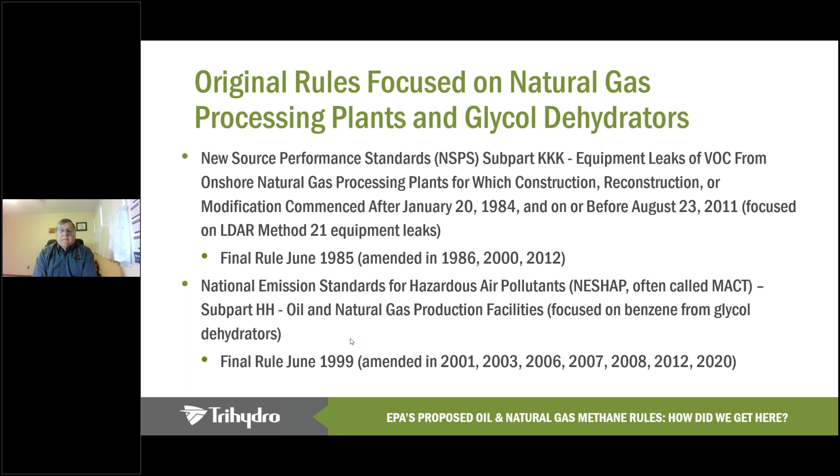Then came what I refer to as the production-oriented regulations. They're the ones that most people are thinking about, especially in the upstream oil and gas production sector. First, there was Quad O. That's a new source performance standard, and it applied to facilities that were modified, constructed, or reconstructed after August of 2011 and before September 18th, 2015. That rule first came out in August of 2012, and it was amended several times over the years, which makes it a little challenging to keep up with all those details.

Then came the infamous Quad OA. That's what most people are thinking about and dealing with right now on the upstream side of the world. Quad OA was finalized in June of 2016. It applies to facilities that were constructed, modified, or reconstructed after September 18th, 2015. And again, there have been several modifications since that period in time. Next slide.

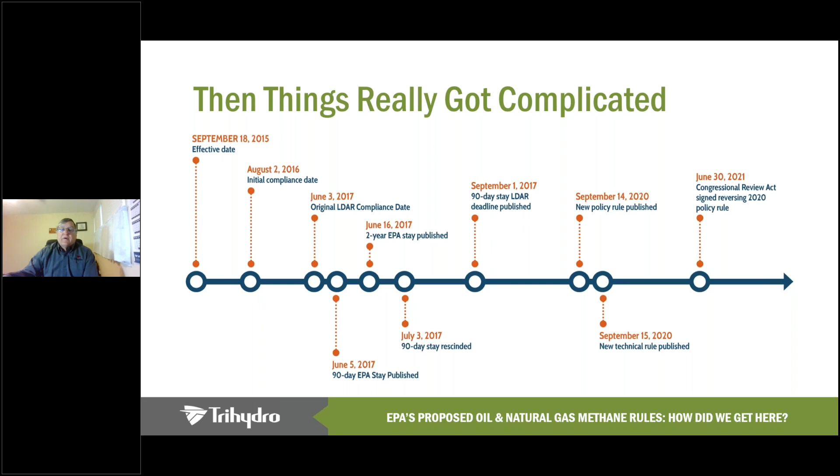So with this, I'm going to go ahead and transfer over after this slide to Jennifer Biever. But I thought I'd give a little background for Jennifer before she starts. Jennifer is a director at Williams, Weiss, Fowler, and Ferguson. She's a licensed attorney in Colorado, North Dakota, and New Mexico. She assists companies with respect to all aspects of state and federal air quality and climate change regulatory regimes, including rule and guidance development, permitting, implementation of guidance programs, self-evaluation of compliance, and enforcement.

Jennifer is one of the leading legal experts on methane emissions from the oil and gas sector, having led industry's efforts in Colorado's numerous methane rulemakings, and having represented several companies in enforcement at the state and federal agencies with respect to emissions from oil and gas storage tank facilities. Jennifer has represented a range of companies in the energy and natural resource space, from oil and gas operators, pipeline companies, ski areas, mining companies, and industry trade associations. Jennifer will be sharing EPA's proposed NSPS Quad OB and Quad OC proposals. And Jennifer, I'll turn the presentation over to you.

Thank you so much, Jay. I'm really happy to be here with all of you today. I think Jay did a great job of explaining the quagmire that is Quad O, as I like to say. One of the things that I thought about doing, but then I figured it would make you try and guess my age, was to do a poll on what Quad O letter they will be on when I decide to retire. That's kind of my internal ongoing bet that I keep placing with myself.

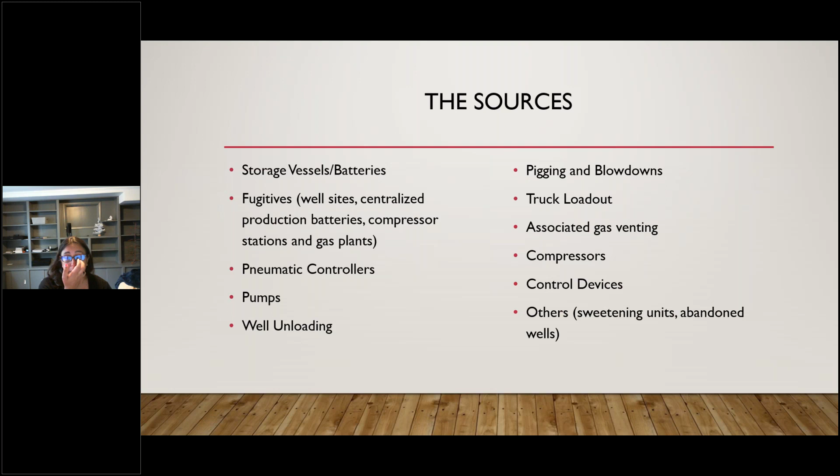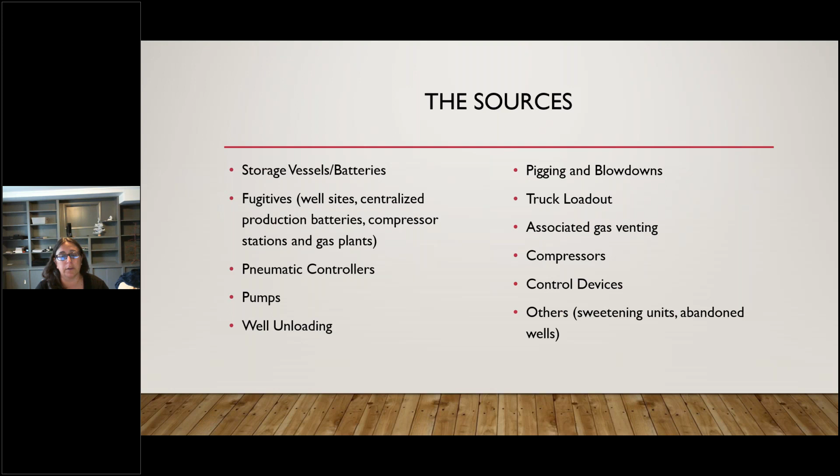Truck loadout, associated gas venting, essentially, either venting or potentially requiring flaring from separation equipment when you can't get into a gas sales line. Compressors, and control devices, the actual control devices that are used on the pumps, the storage tanks, the associated gas venting, and then a few other topics like sweetening units and abandoned wells. Next slide, please.

So let's talk about storage vessels. What they're doing with storage vessels is pretty significant. And as many of you probably know, there is a lot of history around storage vessels under Quad O, and generally with EPA. When EPA first did this, they did the Quad O and Quad OA on an individual storage vessel by storage vessel basis, as opposed to a battery. But the reality is that for most facilities, particularly new facilities, most of these tanks are in a battery. They're not typically single storage tanks.

And so what that had done is create a lot of confusion, and their regulations are not very clear currently on how you calculate the emissions from each storage vessel when they're part of a battery. And so there's been a lot of disagreement among EPA and industry about what is sort of standard practice for that. And in addition, storage tank batteries have undergone a series of enforcement cases throughout the country. EPA, I think, has issued consent decrees with 10 to 12 different companies, some of them as recently as last month, on emissions from storage tank batteries. And typically that's emissions from thief hatches and pressure relief valves that they believe should be making it to the control device.

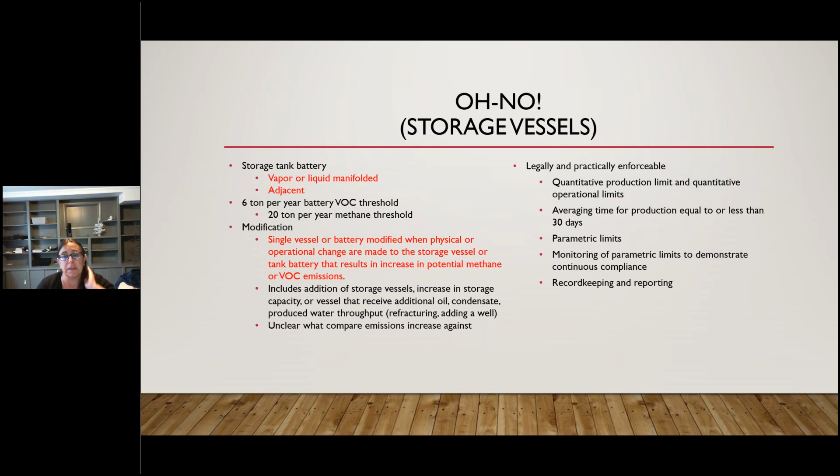And I think the key is, I'm not aware of a state, even though there's many states that have pretty stringent control requirements, that would actually likely have all of these parameters in place currently if EPA keeps this kind of legally and practically enforceable threshold. Next slide, please.

So pneumatic controllers. This is probably the one that many of you are the most concerned about, and I think it's probably one of the most concerning. Under the current requirements, it has focused historically on whether you had high bleed pneumatic controllers and phasing out high bleed pneumatic controllers, but it allowed you to have intermittent or low bleed pneumatic controllers. This new proposal would essentially eliminate natural gas driven pneumatic controllers, except for certain exemptions in Alaska. So it's kind of an interesting proposal.

So they would say that each pneumatic controller is an affected facility, and that all new, modified, and reconstructed controllers have to have zero emissions. Zero emissions does include what they call self-contained, which means it goes back to process. That could be instrument air. It could be an electric or a mechanical controller. One of the things that's not entirely clear, because we don't have rule language, is whether self-contained includes the ability to route the natural gas pneumatic controller to a control device somehow. I would argue that it should, because that's certainly some of the technologies that are out there and available.

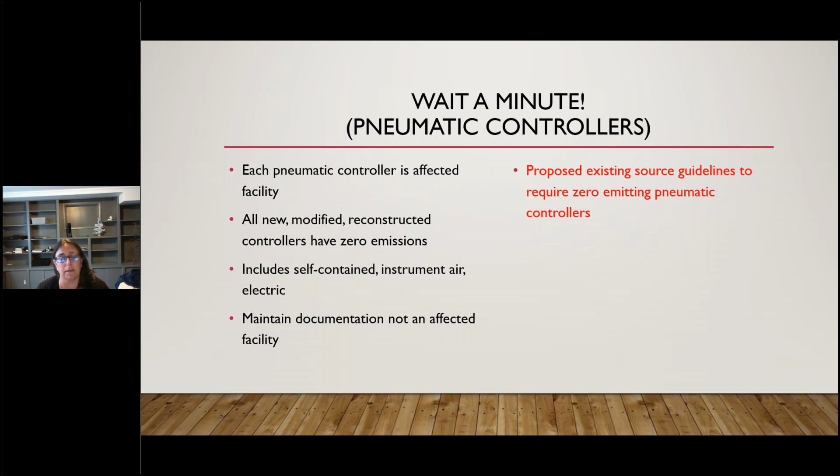This really addresses just each individual controller, and there's not a whole lot of outs. I think this is going to be one of the most contested pieces. I've heard a lot of concerns about vendor availability on this and how we would get all these done for all the people that would need them. And in particular, because they've also proposed the existing source guidelines to require zero emitting pneumatic controllers for existing sources. They expect that would phase in, but again, there's no specific time frame for that. Next slide, please.

All right, this is my other one, the fugitives. This one I actually think has some really concerning pieces. So this would apply for well sites if you had a baseline of methane emissions 3 tons per year or greater. And I think one of the most concerning pieces here is not the fact that you would have to do quarterly leak detection for those. It's that they want you to do a baseline emissions threshold. They say that it might include malfunctions, and it's essentially, in my opinion, a site-specific methane inventory, because they basically mandate that to determine whether you need to comply with this rule, you would have to develop this baseline inventory.

And then there's language in the proposal that says that if there is any operational or physical change that increases the emissions, you would have to redo the baseline emissions thresholds. And I think that is just a completely unworkable scenario. There should be no reason to redo your baseline emissions thresholds unless for some reason you were going to go over a more stringent requirement or under the requirement in the first place.

They also have some concerning language about emissions from closed vent systems and how quickly they require repair. So as you probably know, in a leak detection program, you typically have a 30-day window to repair it, or maybe even longer if you need to go on delay of repair. This suggests that they're going to come out with language that says from a closed vent system, so like from a thief hatch or from a PRV, and I think that's because they think these could reflect concerns with design or overpressurization of tanks, that you have to repair it as soon as possible, and that any emission may be a violation of the no detectable emission standards that are currently in the Quad O and Quad OA rules, but have not historically been viewed in that manner.

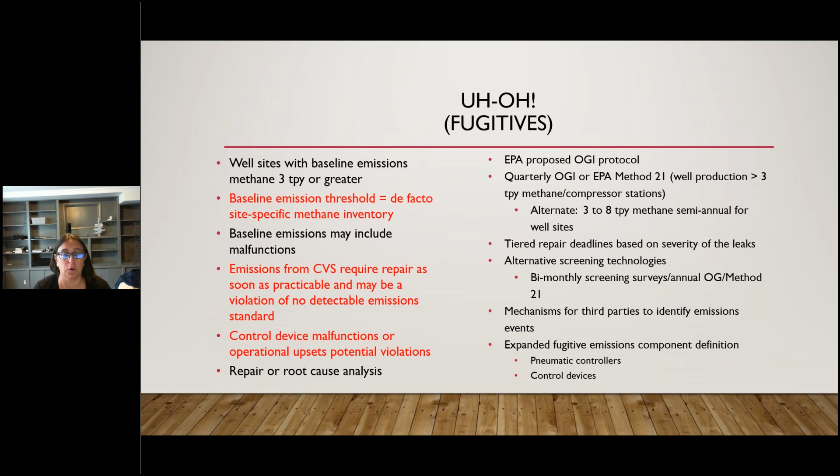And then finally on the fugitives, they basically have an expanded fugitive emissions component definition. So they now include pneumatic controllers and control devices. And historically pneumatic controllers are designed to vent natural gas, and so they were not included in that. This sort of follows a program that Colorado has where they do require OGI on pneumatic controllers to determine if they're operating properly. Next slide, please.

All right, well liquids unloading. So one of the things that's a little unclear is language in the proposal suggests that this is limited to gas wells. But again, because we don't have rule language, it's not 100% clear. It seems like it probably should be limited to gas wells because that's really where well liquids unloading occurs. But it ultimately requires liquids unloading with 0 methane or VOC emissions unless it's not technically feasible or safe, in which case you would use BMPs. This is a pretty stringent requirement.

You know, Colorado just adopted a well liquid unloading rule, I think the first in the nation, and it does not require 0 methane or VOC emissions for all well liquids unloads. It has a threshold and is based on how many times a facility might unload, and allows for a whole host of other considerations. There's 2 ways they're thinking about this well liquid unloading.

One is option 1, which is that the affected facility is defined as every well that undergoes liquids unloading, regardless of whether that liquid unload vents to the atmosphere. So here that would include plunger lifts, artificial lift. So something that is defined as well liquid unloading, even if it doesn't emit to atmosphere, would be an affected facility, and you would have to maintain the records of the number of unloads, even if it does not emit. That seems highly problematic to me, given that many of these artificial lift scenarios are designed not to vent to atmosphere necessarily, and I don't know that everyone has a good track on how often those are operating or unloading.

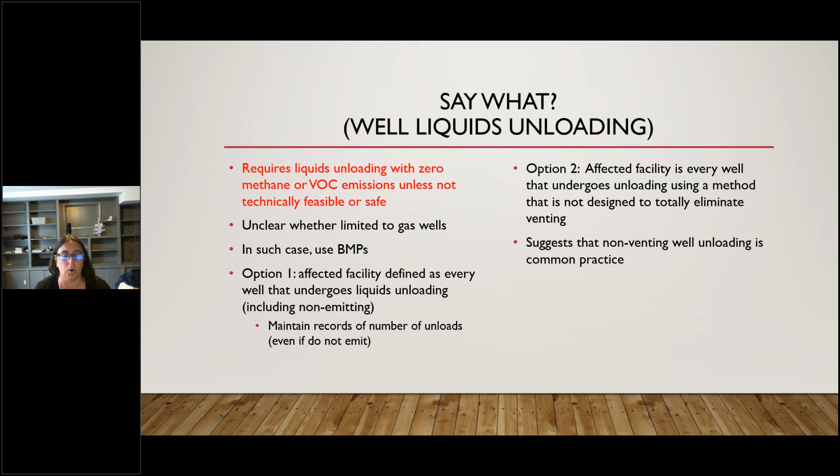The second option is that the affected facility would be every well that undergoes unloading using a method that's not designed to totally eliminate venting. So if you have emissions from your well during well unloading, then you would be subject to Quad OB. And it's interesting because ultimately there really is no Quad OC for well unloading, because every well unload would be a modification, they basically suggested, so that you would always be triggering Quad OB if you did any unloading. Next slide, please.

So a couple of others that I won't go into as much detail on, but reciprocating compressors. So there are existing requirements for reciprocating compressors for you to replace rod packing either every 26,000 hours of operation or 3 years, whichever occurs more frequently. They are considering another mechanism here for reciprocating compressors, which would be to monitor the rod packing emissions annually using some sort of flow measurement, and then replace the rod packing when you exceed 2 scfm.

Or you could route to a process via a closed vent system under negative pressure. I understand that 2 SCF per minute could be particularly problematic. And another piece of this is that in any event, no matter where they land on reciprocating compressors, those had historically been excluded from production facilities, and now they will apply as proposed at centralized tank batteries. So if you have a centralized tank battery, even though it's in the production segment, reciprocating compressors at those facilities would either have to comply with this new requirement, or probably if they stick with the 3-year 26,000 hour requirement.

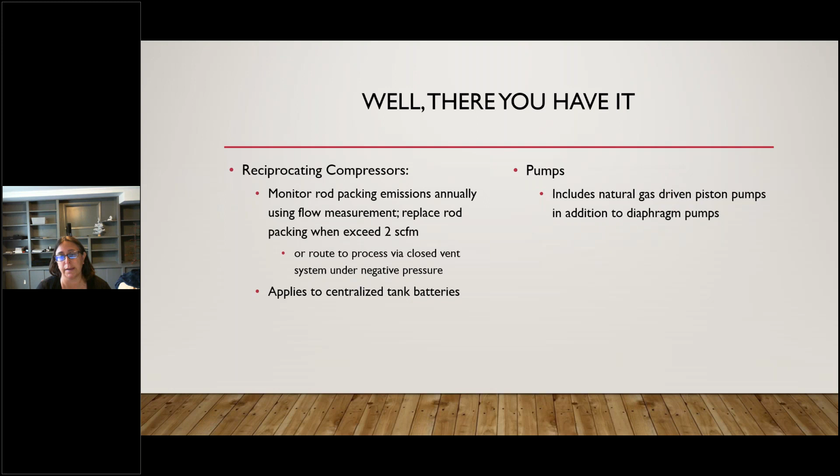Pumps, just wanted to note that it now, under this new proposal, would include natural gas driven piston pumps in addition to diaphragm pumps. Next slide, please. All right, a couple more.

Associated gas flaring. So this is from the separator, and they essentially say that they think the best system of emissions reductions is to route the associated gas to a sales line. They define the affected facility as any oil well that produces associated gas. So I think that means it's pretty much every oil well. And so they're saying you should route it to a sales line. And then if you can't, they require you to flare it. You are not allowed to vent it, and you would have to meet the flare requirements at 60.18 as part of that, and part of the proposal.

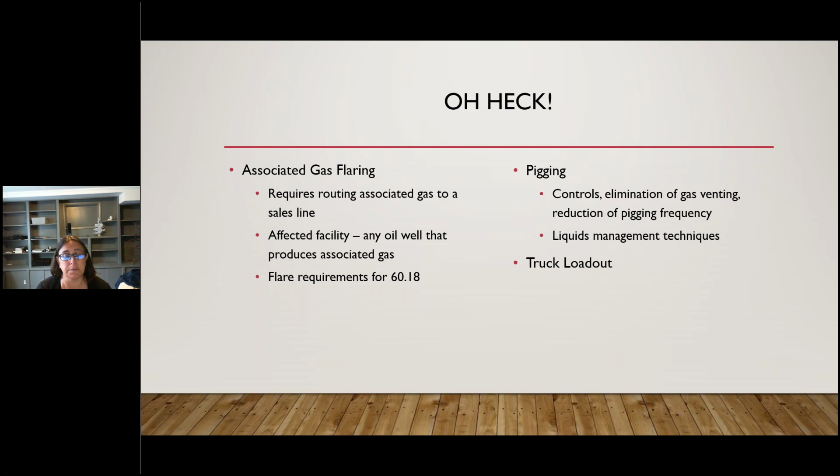2 of the things that I mentioned earlier that they are looking at is for pigging and truck loadout. Those are ones that they did not have a real proposal conceptually thought out, that they are looking for information on. Colorado regulates truck loadout, and also just adopted rules for pigging in the midstream sector. And New Mexico, they're not totally released in writing yet, but they just adopted last month some pigging requirements there that include more than just midstream, also upstream. And so they've thrown out there for pigging some of the things they're thinking about, whether it's controls, reducing the pigging frequency, eliminating the venting during it, or other liquids management techniques that would reduce the emissions from pigging.

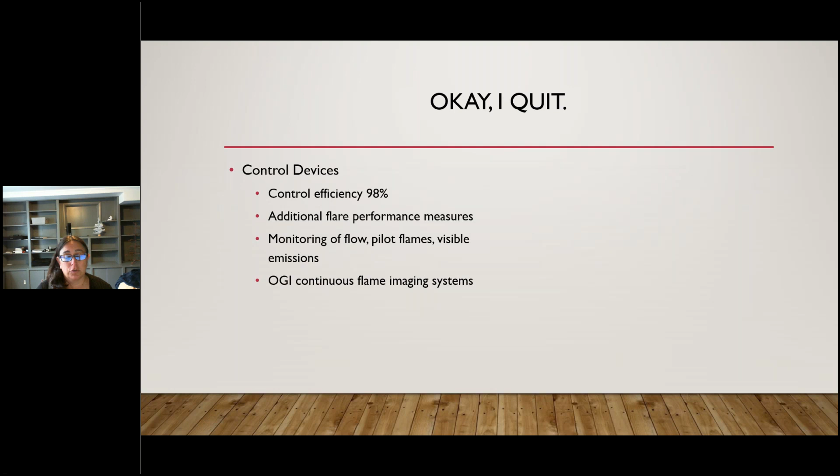Next slide, please. All right, so control devices. One of the things that I'm not entirely sure, but they mentioned something about considering using control efficiencies at 98%. It's unclear because we don't have rule language how that would impact all of the existing facilities that currently use control devices that only have 95%, or states where they don't let you take more than 95% control, even if the manufacturer's design says it's more than 98. Sometimes they'll only let you take 95. So it's one to keep an eye out for when we see the rule language.

And then this, again, as I said, this is getting to be a priority issue for EPA. They are potentially considering additional flare performance measures, whether that's monitoring of flow, pilot flames, visible emissions, or continuous flame imaging systems. Colorado just developed a flare performance or combustor performance rule in December. And I think there were a lot of concerns and a lot of discussion in that rulemaking on low flow for flow metering, when you can conduct performance tests, the methodologies for conducting performance tests. And so I think that this one's going to, again, be one to watch pretty closely. Next slide, please.

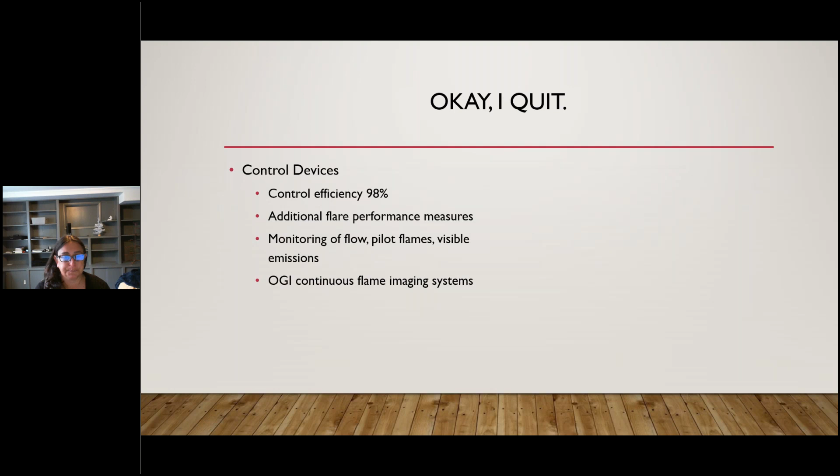So I think there will be another opportunity to comment, as I mentioned, when the supplemental comes out at the end of the summer. And just keep an eye on the states' rules for existing sources. Many states already have existing rules, and pending, and they will also have to be looking at what the rules come out for Quad OC and how that dovetails with the existing requirements. And then timing, EPA is proposing a 2-year compliance timeframe following whenever the state submits their plan submittal, which again, we don't know entirely.

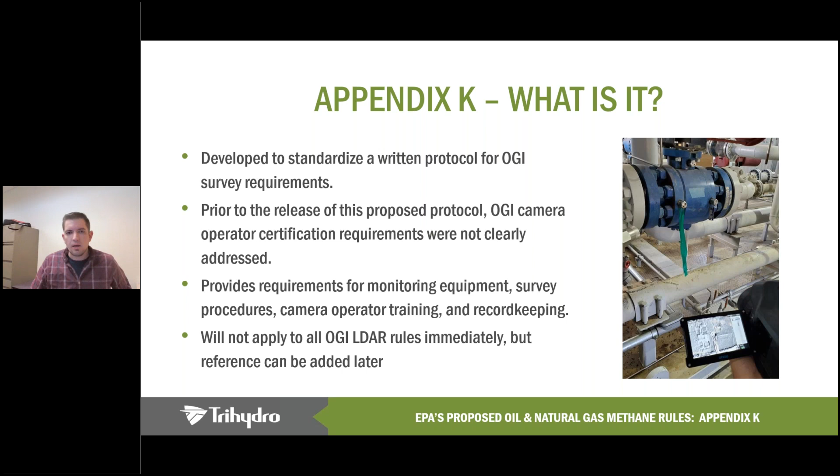So for the first time ever, we have requirements for camera operator training. In a lot of rules in the past, especially Quad OA, there were requirements to report basically information on training and experience. But technically, it could be zero. You could say zero training, zero experience, and that's okay. But now you're going to be required to actually have full, robust training. And there's a couple concepts here: one is senior OGI camera operator, and the other one is just an OGI operator.

The senior OGI operator is going to be required to have a minimum of 500 surveys over the entirety of their career, with 40 of those in the past 12 months. So you can't just have those 500 surveys, not do any surveys the last few years, and still be considered a senior OGI operator. That person also needs to develop the classroom camera training. They say completed or developed. There's some ambiguity there.

Is it just, does that person have to attend a training? So we'll see what actually gets resolved with that. But with an OGI operator, we're talking about extremely robust training to get somebody going. And so right now you can essentially pick up a camera, give them some pointers. We have some training internally at Trihydro, but ultimately that person can still technically complete a survey.

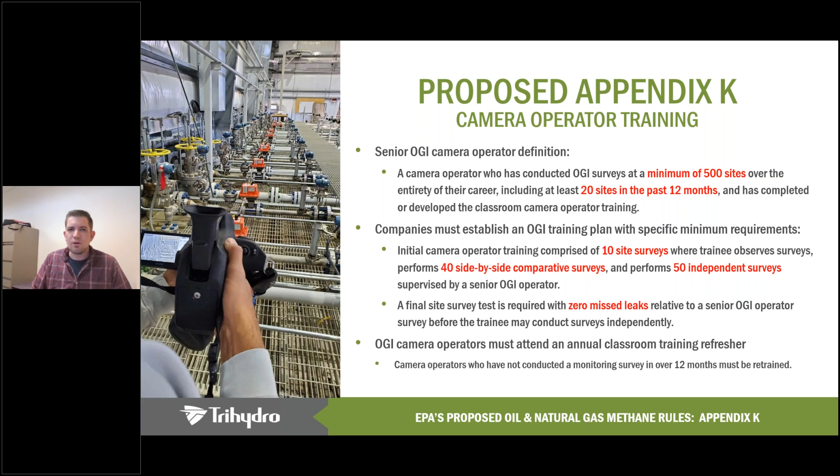The other thing is this training refresher. Any camera operator that has not conducted a survey in the last 12 months needs to be retrained. So this brings up a challenge where a lot of times you'll have your primary OGI surveyor completing surveys, and then you might have an operator or a maintenance person who happens to have a camera out where you can resurvey a leak left open from a survey. Well, if that person isn't trained according to these requirements, they're not going to be able to confirm that leak using the camera. So that's going to fall back on, can you use soap bubbles? Can you use a TVA via Method 21? How do you do that if you don't have that training?

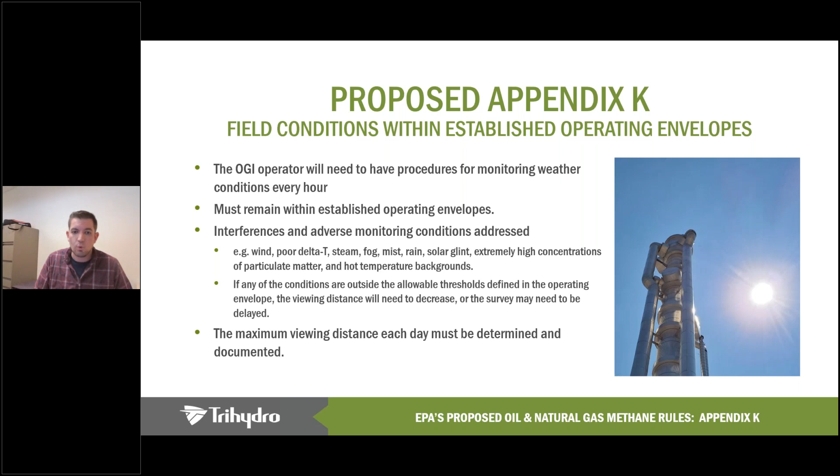So digging into the actual methodology of a survey, ultimately we're talking about really time-consuming and even video data-intensive things that you're going to be required to collect, but also just do. So a lot of us are used to doing daily verification checks. That's something that is required in even Quad OA. And for those of you familiar with Subpart W, you're required to do a daily instrument check in that case. Same thing, but in this case, they're requiring you to actually record a video of that.

Another video you have to take is this quality assurance video, as it's called. It's got to be a minimum of 5 minutes, and it has to document all of the procedures the operator uses to survey. So getting into those dwell times, your viewing angles, distances, backgrounds, how you're getting good delta T, and what camera configuration you're using. So this is one of the most challenging things to implement.

If you have to have a video that has all of those things, what about temperature, right? If you are constantly adjusting temperature, because that's a requirement of the camera, depending on the equipment, the ambient temperature, there are a lot of temperature changes that we experience when you're doing a camera survey. And so if you have to reflect every single one of those combinations, is that really realistic? And it's certainly not realistic in just a 5-minute video.

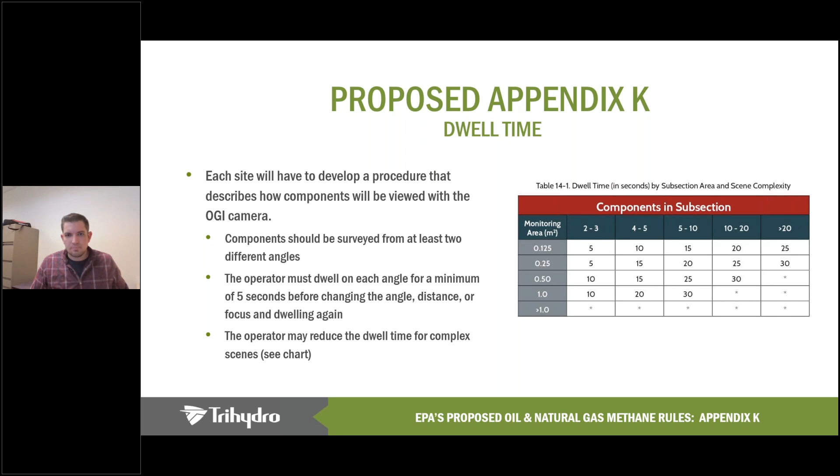Going from your equipment records, so all of the information on your maintenance, documentation, daily verification checks, getting into that 5-minute plus video, your survey information, so general info on, let's say, met data, start and end times, all of that, leak data, so pictures of leaks, all of the information associated with component type, subtype, GPS coordinates, all of that. What your operator training and audit records look like.

A lot of us have a certificate, but have we been tracking all of these hours and other things associated with it? Maybe not. But ultimately, we're going to need some good solutions there. In my case, and Jay had mentioned I'm the subject matter expert on our leak tracker team, that was something that we developed so that we can actually comply and collect all of this information. But ultimately, we're going to need something.

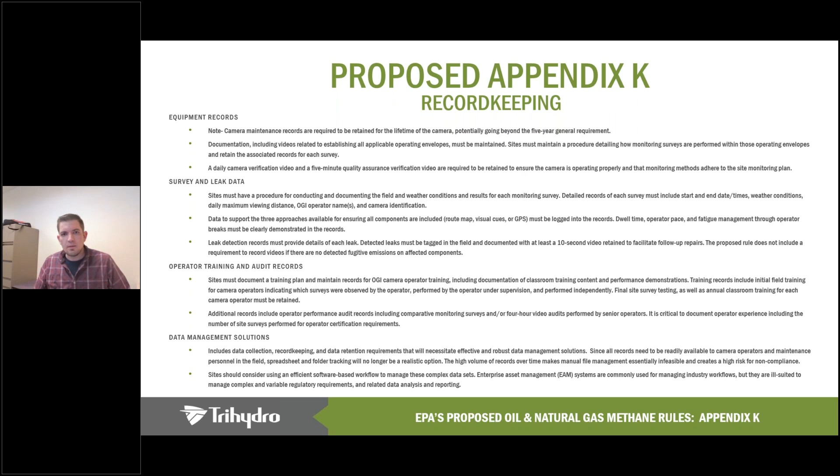Next slide, please. So that's really the core of Appendix K, the main requirements. We could get into the weeds even more than that. But what do you do right now? Is there anything that you actually can do to try and maybe prepare yourself for a final rule?

So there's a few things you can do. You're going to want to track every OGI technician's field training and time conducting monitoring events. I would recommend doing hours and surveys, that's a good thing to collect. Check your current OGI equipment. Is it compliant? Is it something that you're going to have to send in for calibration? Is it even a technology that can meet the requirements within Appendix K in terms of sensitivity?

Have a system in place to track all of your OGI camera maintenance records and just general data management and training. If right now you're using Excel, there are a lot of solutions out there that you can use that really can collect all of this information and store it in one place and have it readily available. Make sure you're assessing those things.

And lastly, assess your training level of personnel right now. Do you have a senior OGI operator? If the answer to that is no, that could be a real challenge. You don't have anybody that can conduct training, do performance audits, do anything at a higher level beyond an OGI camera operator. Is it something that you could get somebody to that level before this goes final and hopefully be able to grandfather that person in? All things to be considered.

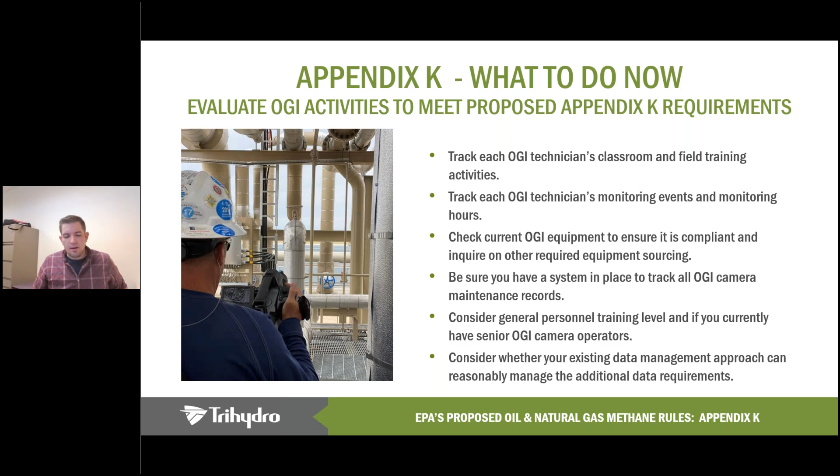Next slide. So I'm just going to touch on a few things, moving away from Appendix K. We're dealing with a lot of ESG related items now. ESG, it's the big word, it's the flashy word. Everybody's talking about it. We know we have the SEC rule for those of you that are working for a publicly traded company. But ultimately, the takeaway here is ESG by itself is not a replacement for being compliant. The governance piece of that really is complying with regulation.

And something that I always like to talk about is, sometimes you can do these ESG or voluntary type programs at very minimal cost. Sometimes you can balance operational excellence with enhanced environmental performance. So if you can show quantitatively that you're not emitting as much, but at the same time keep something in your pipes more, or operationally be more efficient. Sometimes it can be even in terms of combustion on your engines. If you're able to make something more efficient and use less fuel, that's also a good thing, and it's going to save you money.

Something that we're dealing with a lot is this concept of RSG, responsibly sourced gas, sustainable green gas. ESG and a lot of these voluntary programs tend to be shareholder or investor driven. As we start dealing with some of the export companies sending gas, for example, to Europe, especially in today's world, their expectation is that you've got sustainably sourced gas. So if you can do things now to start showing that the way that you're producing and transporting your gas is responsible and so-called green, that's going to give you a lot of leverage later in terms of proving that, if maybe some of your dollars are actually tied up in that way.

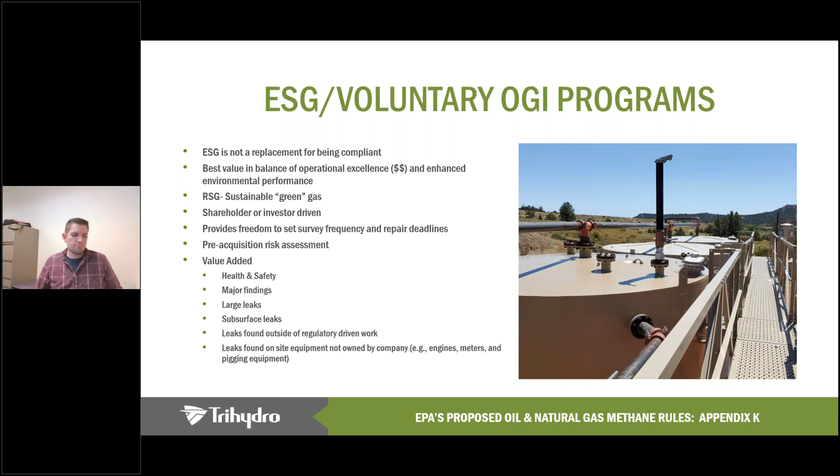facility, historically, you go up with a sniffer maybe, but it might be behind a fence. Well, if they're going to see third-party equipment at your facility, it's going to be expected that it's yours. And so you can use the camera to just glance at it, make sure that there's nothing leaking. And if there is, you can contact that company and have them go ahead and assess that. Next slide, please.

So the thing that I'm going to end on is new technology. We tend to always want new technology. It's a good thing. In a lot of cases, it makes us more efficient and really enhances our ability to detect leaks and do our jobs. You know, there are always strengths and weaknesses of every technology out there. So here we're talking about OGI in a lot of cases, but there's a lot of continuous and drone, sky-based, satellite imagery, you name it out there.

The message that I'd like to send to everybody is sometimes one technology isn't the best, but another one is a little bit better, but in a lot of cases, they can be complementary to each other. So something that you can do as an example is have a continuous type sensor that would alarm somebody to go boots on the ground with OGI technology, or be able to quantify a little bit better on site, find exactly what the leak source is. Using multiple technologies sometimes is the right method.

But don't purchase a technology or buy into a technology until you've figured out what you need. Is it regulatory driven? Is it even allowed from a regulatory side? What's the data? Is it public data? Is there information using one technology to another that you don't want out there? Just assess all of those things and make sure that the technology that you're investing in and putting your money into actually is going to be effective for your facility, and not just trying to get a technology out there and just kind of make it work for your facility.

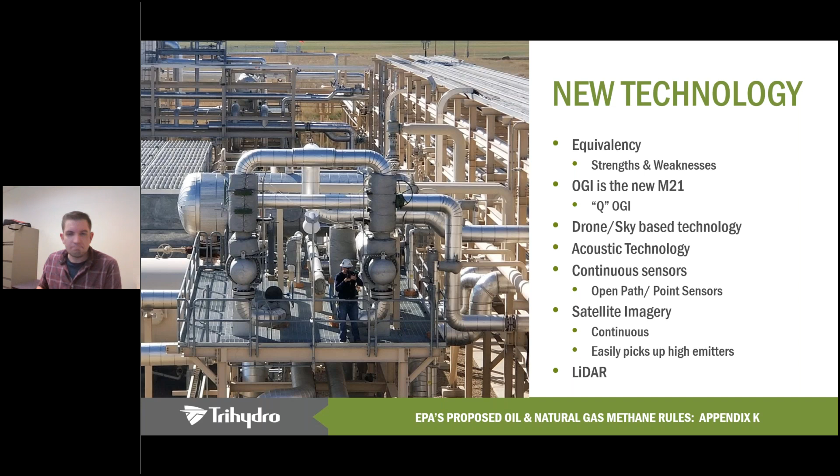I guess if anybody hasn't been thinking a lot about Appendix K so far, hopefully this gives people a lot of ideas about saying, ooh, this might be a big deal and I better react to it. So now we're going to shift into questions and answers from the panel. So thanks everybody for paying attention. We've got a few questions already, but I again want to encourage people, even as we're wrapping up the day today, to go ahead and put some questions out there that we can get our experts to respond to. So I'll throw out a couple of them right now.

First one I got here, and I'll probably be paraphrasing some of these, but Dan, how much longer would an OGI survey take with the new Appendix K requirements as opposed to what is kind of the norm right now? So right now, since we're going to be dealing with all of the dwell time and additional requirements just for collecting data, we're estimating somewhere in the 3 to 4 times range. Now, it's going to vary a lot by facility, but that's kind of the expectation now. So 3 to 4 times as long to do the equivalent inspection of what might be going on today in normal. Exactly. Okay. And that translates into dollars ultimately for a lot of the operators.